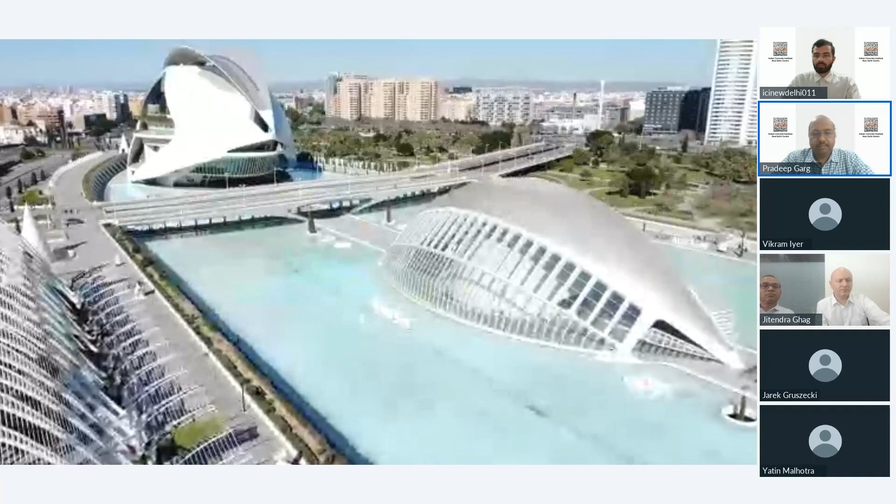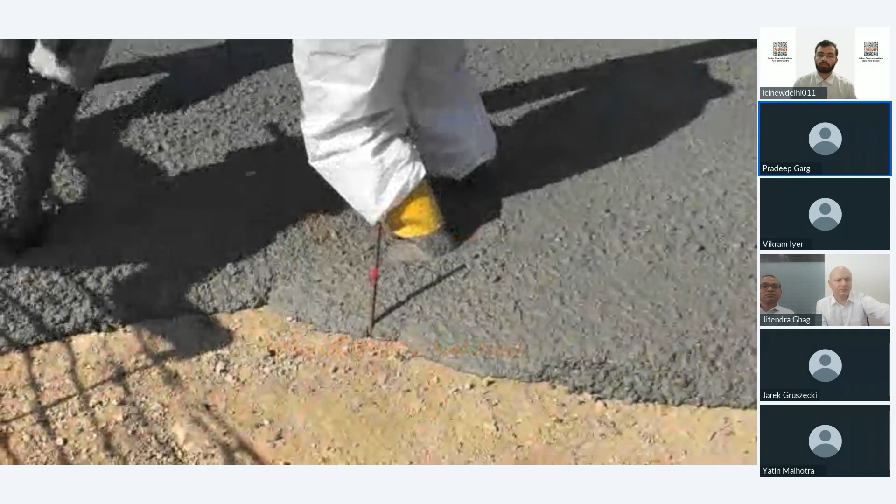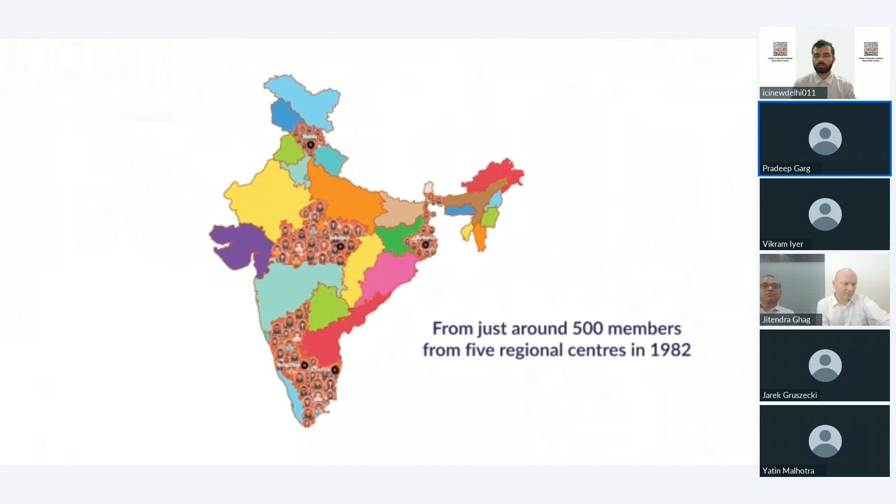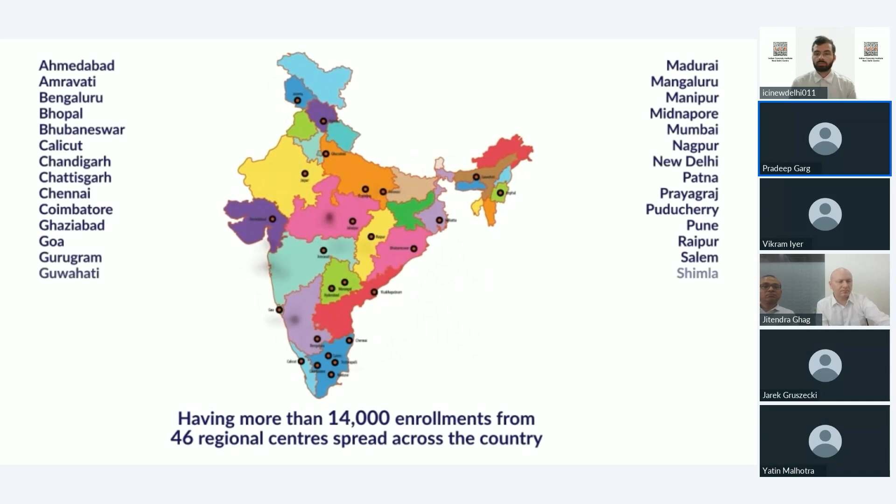Civilizations have prospered because mankind has taken gigantic leaps to harness technologies to create infrastructure, the backbone of all economies. The binder at the core of infrastructure development has been concrete. Spearheading advances in concrete and concrete construction in India is the Indian Concrete Institute, one of the leading professional bodies catering to the professional needs of individuals and organizations involved with concrete. As a non-profit organization, ICI is dedicated to the cause of disseminating knowledge and addressing constant research needs in the field of concrete, as well as to promote concrete technology and quality in construction. In 1982, SERC Chennai and Anna University jointly conducted an international seminar on modern concrete construction practices. The delegates of the seminar resolved to form an organization to spread knowledge so that developments in concrete could be shared with many Indian engineers. Thus, the Indian Concrete Institute was formed. From just around 500 members from 5 regional centers in 1982, ICI has grown today to be a strong professional body having more than 14,000 enrollments from 46 regional centers spread across the country. Of these, more than 400 are organizational members. Today, ICI is a binding force, creating synergy between all segments of people, namely practicing engineers, consultants, designers, manufacturers, research scholars, academicians, and students.

ICI, through its regional centers, conducts varieties of programs like seminars, workshops, conferences, exhibitions, training programs, webinars and more, each providing participants platforms for learning and sharing at national and international level. Each ICI event is a great opportunity to listen to and interact with all segments of people in the concrete industry and get updated on the latest materials, technologies, and practices.

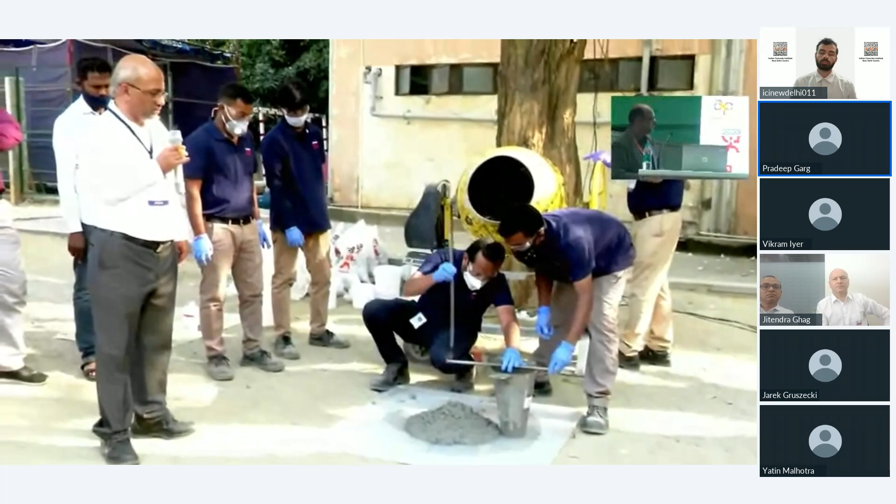ICI's program Deminar is a unique event combining demonstration and seminar. Here products are demonstrated outside and live streamed into the seminar hall, so participants can observe the demonstration while it is being explained by the speaker.

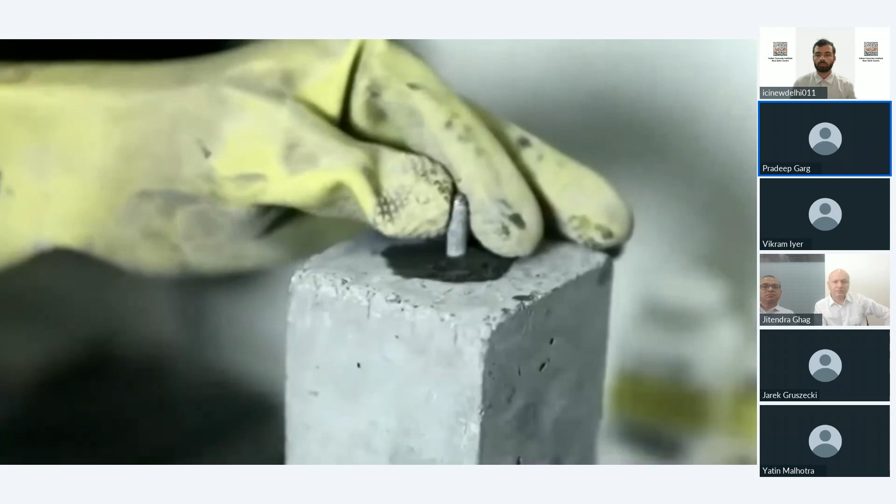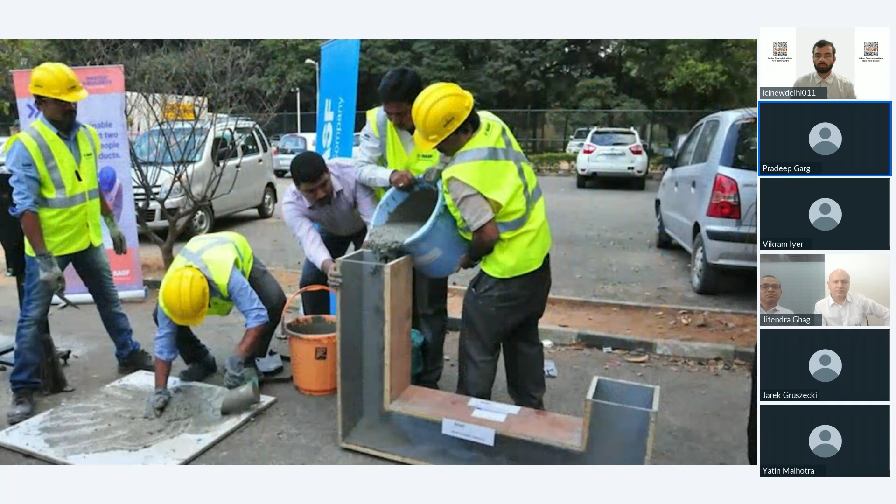ICI events, among other things, are focused on sustainability through the use of innovative materials and techniques. The response to such programs from government bodies is overwhelming. The objectives of ICI are clearly defined. Every action of ICI focuses on a tangible output for the benefit of practitioners, end users, and society at large.

On 7 September every year, Concrete Day is celebrated as an annual event at all centers in a big way, to commemorate the day of formation of ICI.

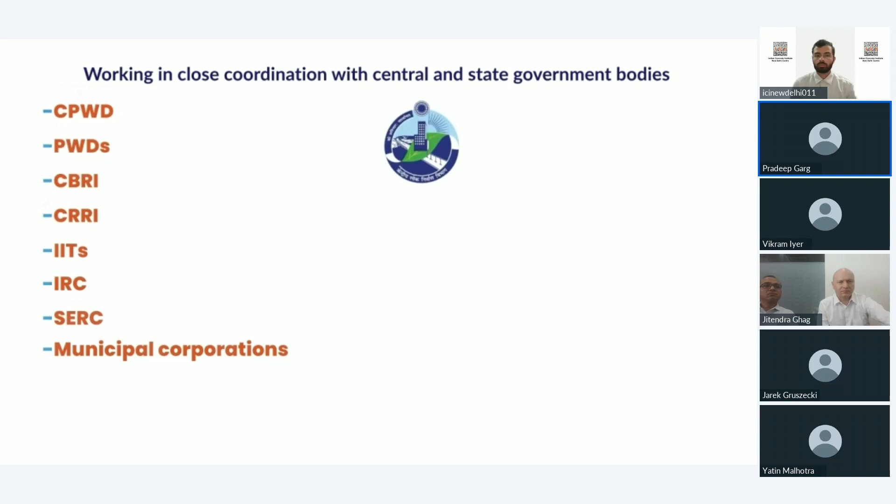Working in close coordination with central and state government bodies like CPWD, PWDs, CBRI, CRRI, SERC, IITs, municipal corporations and more, ICI helps these bodies adopt the latest technologies and practices in infrastructure building. ICI members also participate actively in several committees of BIS, focused towards advocating standardization in construction practices.

ICI is participating actively in the Asian Concrete Federation, a group of professional bodies of more than 10 Asian countries. ICI has signed MOUs with many other peer concrete institutes around the world for exchange of technological information, technical documents, and to organize programs jointly.

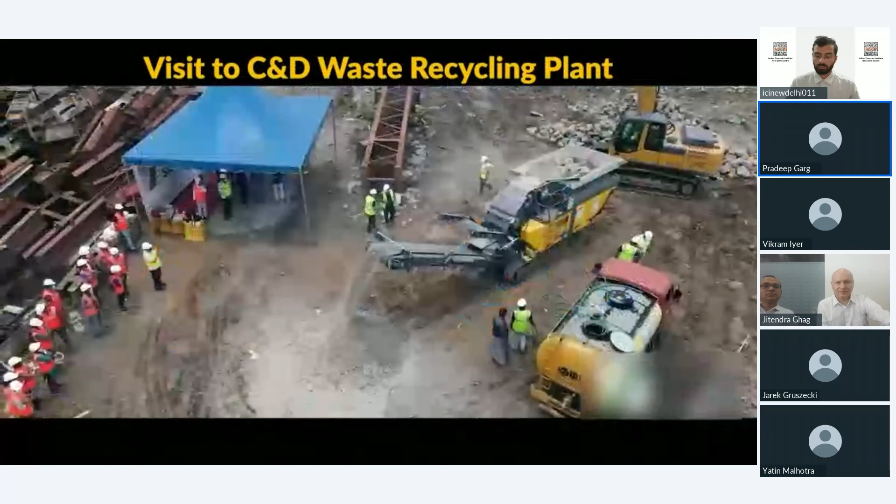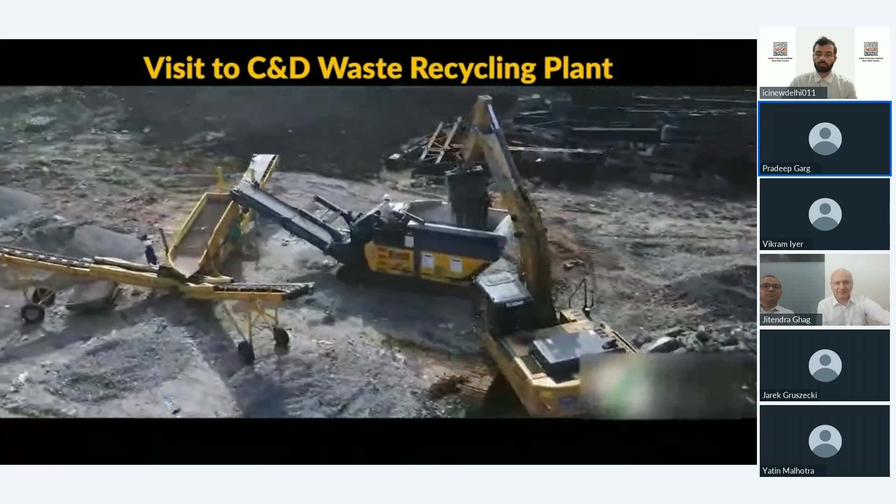Keeping the ever-changing future in perspective, ICI reaches budding civil engineers through its student chapters. There are more than 300 student chapters all over the country, and the numbers are constantly increasing. Each chapter is focused on enabling industry-academia interaction aimed at bridging the gap between basic theoretical knowledge and professional practice. This imparting of requisite knowledge to budding engineers enhances their outlook and employability.

ICI identifies, recognizes, and awards experts in the field of concrete for their contributions to the development of concrete technology and concrete construction. Every year, 16 such awards are presented at the time of the AGM.

To demystify concrete, the Technical Board of ICI brings out valuable technical documents on topics of importance for the benefit of practicing technocrats through its technical committees consisting of subject experts from different disciplines. ICI conducts need-based training programs at its technology centers as well as customer sites for the benefit of practicing engineers and students.

ICI Journal is of national repute today. Very soon, a journal of international standards will be brought out in collaboration with a world-renowned publisher.

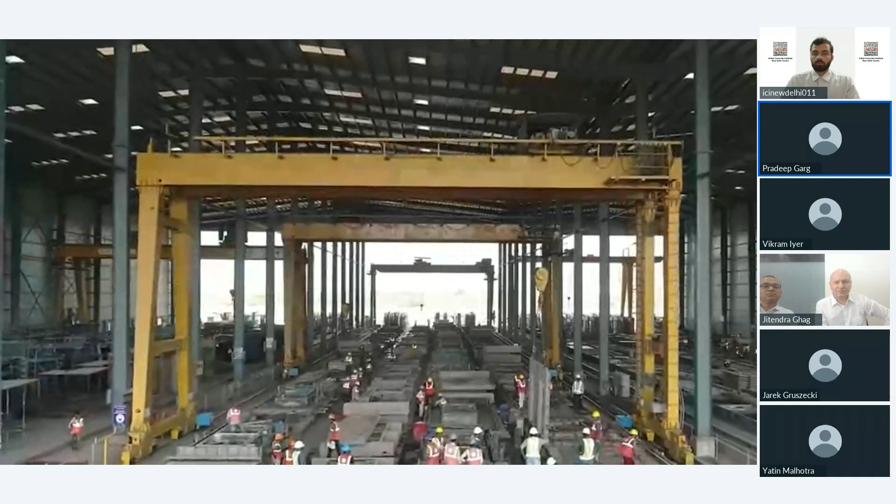Every dawn at ICI summons a new approach and new initiatives to create milestones in the journey of concrete construction in India. ICI has enabled the multifaceted and rapid development of concrete construction in a well-planned manner. It stands proud today with a distinguished reputation as a forerunner and a binding force in the civil engineering industry in India. Come, join and strengthen ICI. Let us make our concrete structures sustainable and durable.

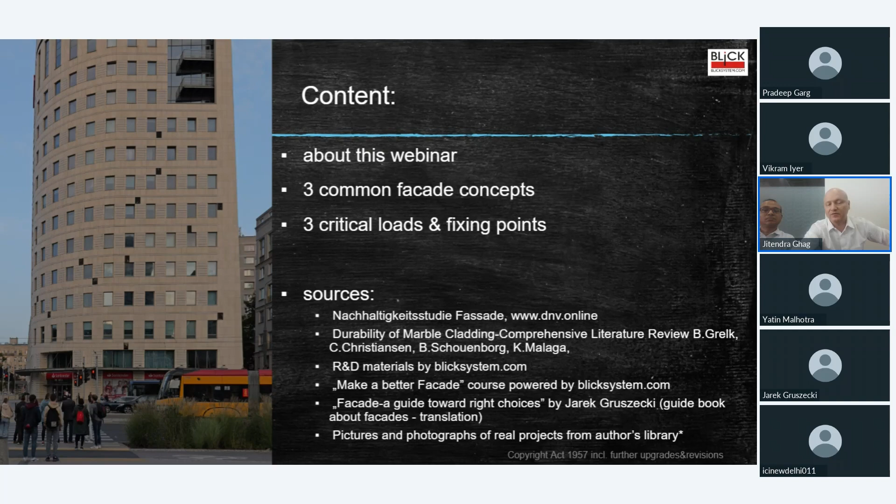In this presentation I also used a lot of data related to concrete, because design of the facade covers not only natural stone, but natural stone is in my heart from childhood. My father opened a company a few decades ago, and we ran a few quarries, majority soft stone. This is a good point, because sometimes we mix stone like one family, and it is useful to split this into soft stone like sandstone, travertine, or limestone, and hard stones like granite, basalt, quartzite. This will help us later in this presentation.

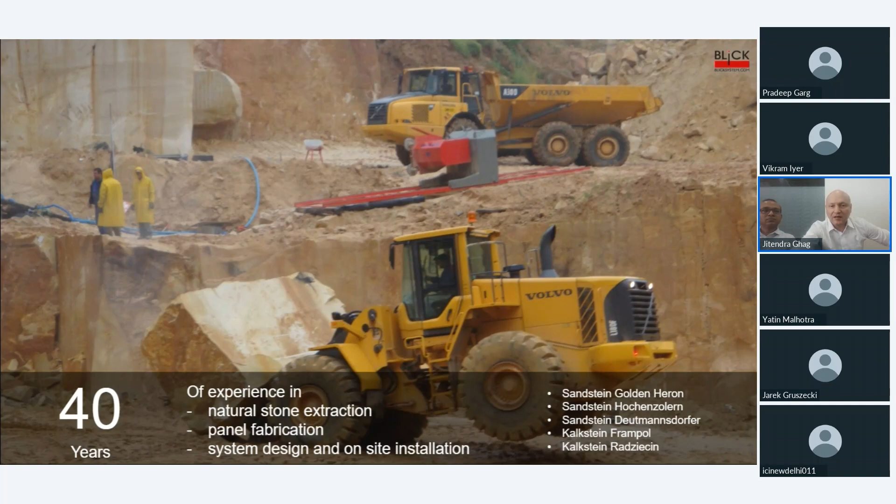So we also ran limestone, and I was working from the beginning of my career a little bit in the quarry, only watching and taking part, and then I was working physically also in the factory. So I have a lot of knowledge regarding the processing of the stone and how to deal with it, about detail production. And then my interest was to develop some solutions useful for fixing on the facade.

Because I noticed a lot of malfunctions or damages on the facade, and then certification, in these areas I could be helpful. But if I hear some interesting questions from you, I'm ready to also learn a little from you, and I welcome students too. I got a question before the webinar from one of the technical consultants related to this topic, and I will use some of that in my answer. It will go through my presentation.

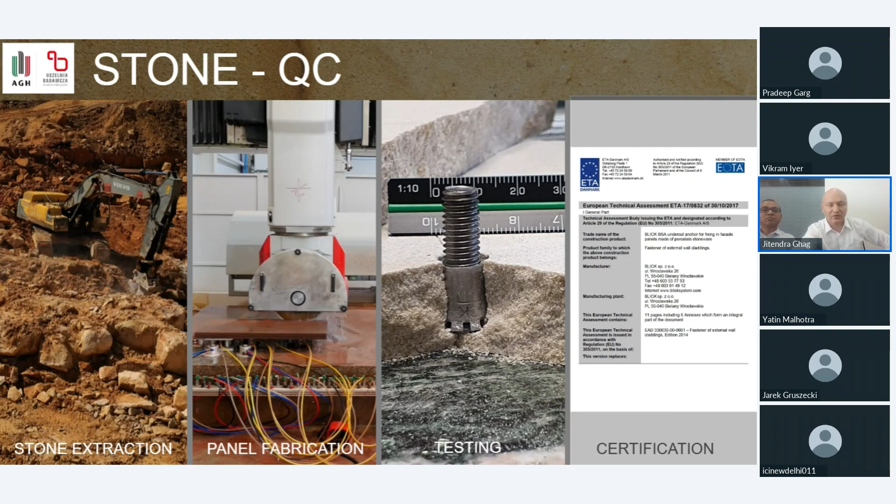I would like to start from the first typical concept of facade, which is wet cladding, I hope known to a lot of you. This is just using cement adhesive and fixing the tile to the wall. In Europe there was a time when 2 or 3 companies certified this system, and the main ingredient, or the way it was built, was that stone tiles could be fixed to the insulation, not directly to the insulation because there were few layers, but it could be fixed to the insulation.

Maximum weight of the stone was 40 kilo per square meter, 5 to 8 kilo per tile. And this is very important, because I noticed that in some projects this limitation is crossed, and then results of this exercise are different. Sometimes the panel breaks, sometimes the panel falls off.

The next limitation of this system is that the panel which is fixed to the wall has to be permeable. This is very important, because in areas where temperatures drop below 0, the vapor changes into water, then it's frozen just in the layer of the cement glue, and in the final result, these panels fall off from the wall. It is a very common mistake.

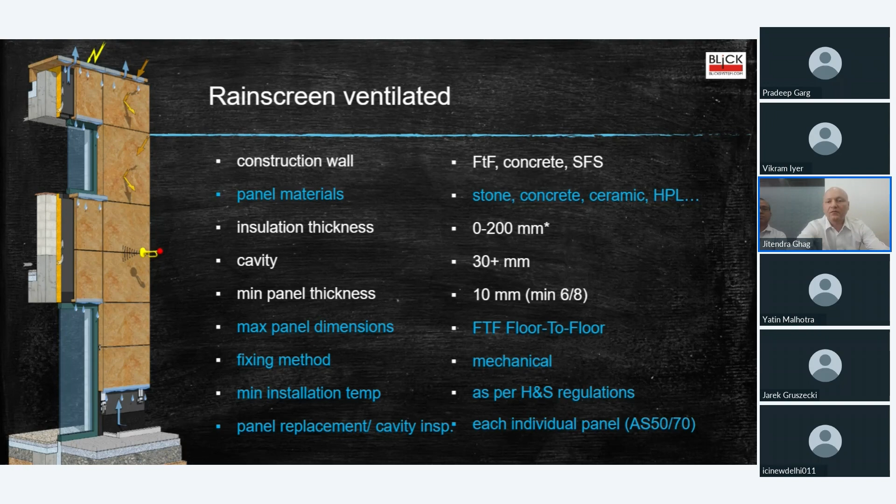Just to confirm that it is possible to install very big panels - this is an example from Africarium Zoo, where in 2014 the world's largest panels were installed. The size of the panel was 6.5 by 3.6 meters, with thickness of 12 millimeters. Total size of the facade was 6,500 square meters.

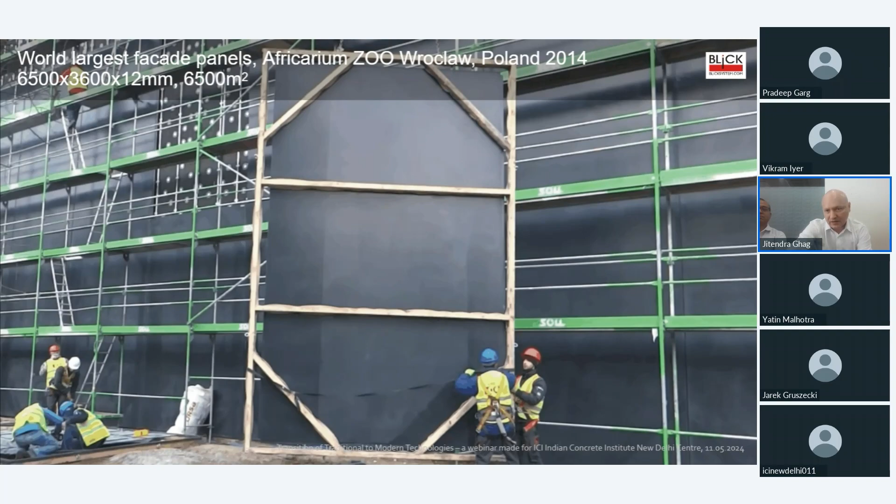And here you can see UHPC made in Pelhřimov in Czech Republic. This was about 16 millimeters, and the panels were also big, not as big as before, but floor-to-floor size.

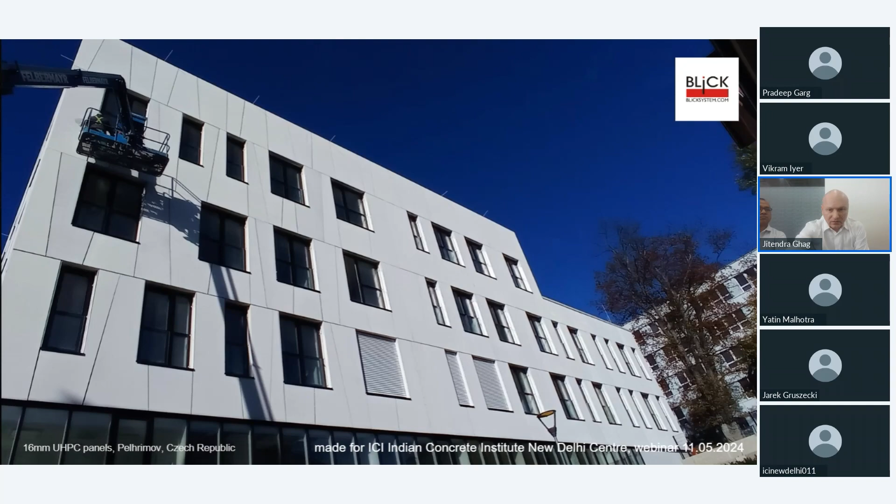Summarizing, we can definitely find successful references of all of these solutions: wet cladding, masonry vented, also rain screen. I think the majority of failures or damages which we find in every country is not only about these systems entering the strong Indian market - you can find malfunctions or damages in many countries. I will show you examples in a moment.

So as of now, I think we know about these three basic solutions. Right now I would like to go to the challenges which stay in front of these facades, because we should be aware of that. I have chosen three for this market, for this climate conditions, from many forces acting on the facade panel that want to destroy our facades. We need to protect it somehow.

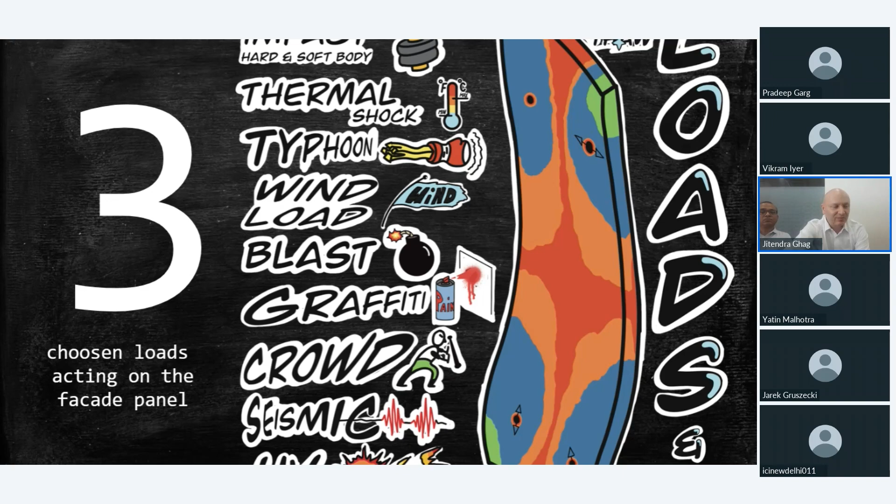The first one is thermal cycles. A very typical question I sometimes get is about zero joint gap, but we need to remember that the panel is exposed to thermal changes.

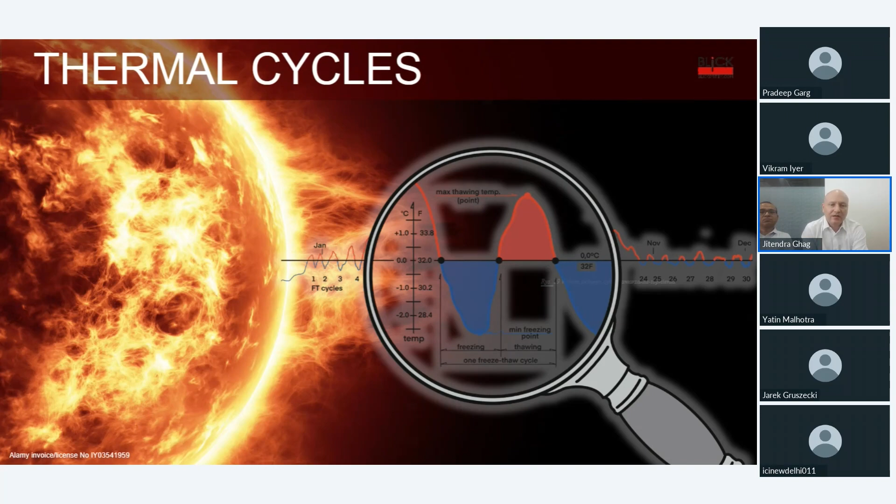This facade is, I think, already replaced, because I got this picture for consultation some while ago. This comes from UK. You see also limestone tiles, which are fixed on the kerf and also protected against falling down.

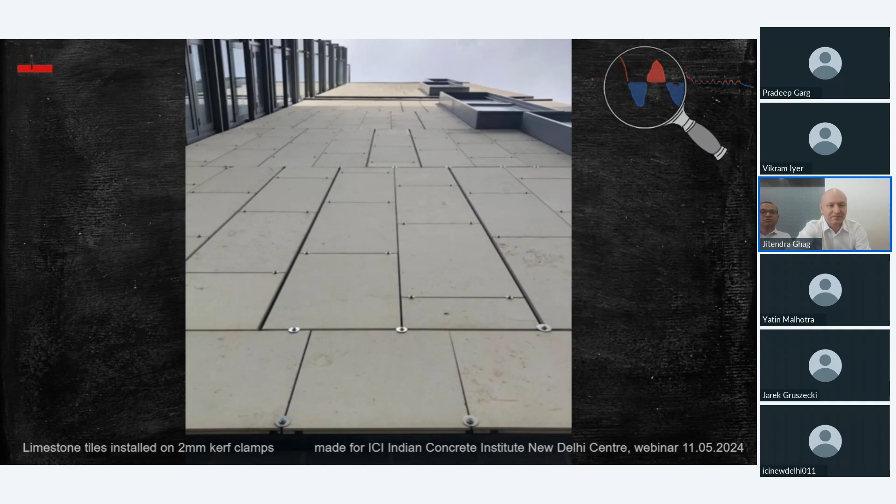Rain screen panels can be fixed in three ways. The typical is pin type, which many of you know because this is very common here. The next one is kerf, and the most advanced is undercut anchor.

The difference in pullout performance of this fixing is very big, because we made a comparison test in Heron sandstone, golden heron, for the German market, known as Hockenauer Sandstein. In 40 millimeter sandstone we reached 700 Newton pullout with pin type. Kerf presented about 1200, and undercut 5000. So this is a big difference.

If you see the space between undercut and pin type, there is a lot of comfort, so that's why we can install thinner panels and also bigger panels. The difference between pin type and kerf is that both these fixings can support the panel only on the edges - pin type in vertical and horizontal joints, and kerf only in horizontal joints.

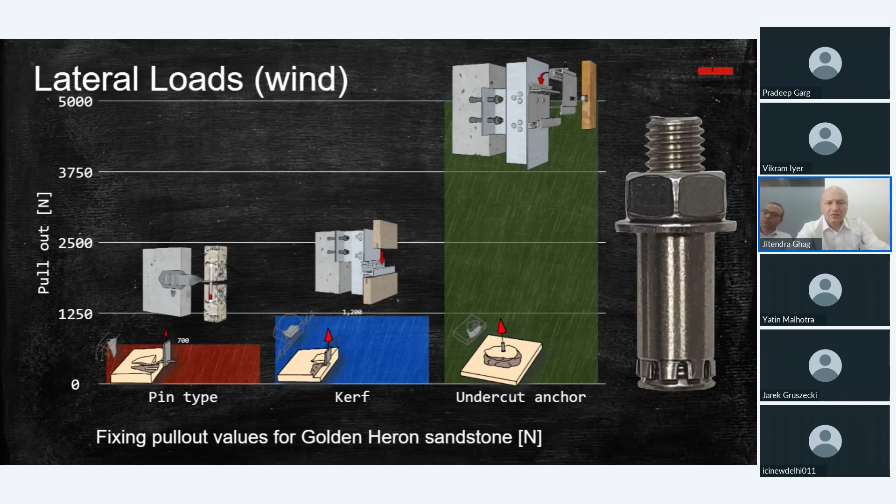The next load acting on the facade is wind-driven rain. Unfortunately, I was not facing the monsoon period in India, but I know, I've got the information, this is very heavy rain. If we combine together wind and rain, we get something like wind-driven rain, which acts on the facade.

How does it work? Normally the rain, driven by wind, blows onto the wall, and especially the top edge and corners of the building are exposed to rain, because in the central part of the wall, the wind doesn't go through the building - it has to pass by, going down or up depending on the central point. So the rain goes directly down.

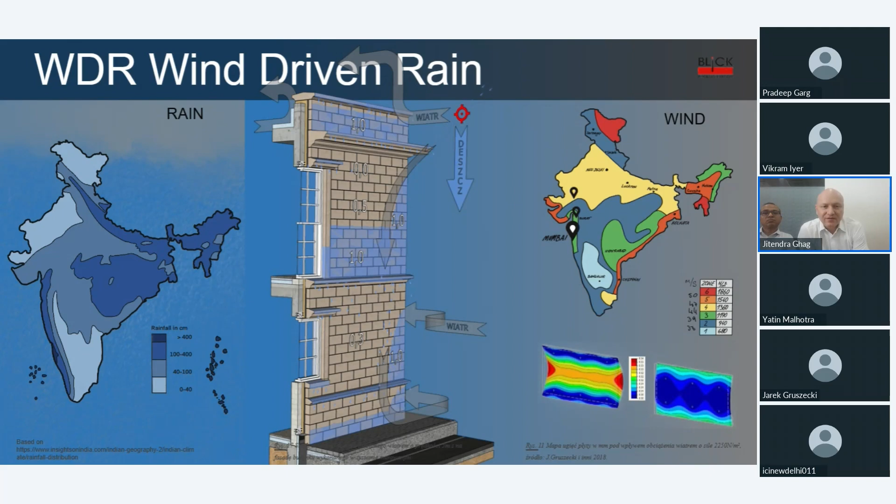So what happens if these assumptions we didn't apply to our design? In this situation, you see that there is no slope on this cornice. So these three points which I mentioned, you can use it and they are working. So there is no slope, the splash water is also affecting the panel above the cornice, and we see that the cornice is generally working well because panels below the cornice are clean.

I met last time Professor Marek Debisz from the Academy in Krakow, Mining Academy, Technical University of Mining in Krakow. He wrote a very interesting technical assessment related exactly to this topic. After reading this interesting literature, I found out that loss of flexural strength can cross 30% of the technical parameters of the stone, which is huge.

Lastly, I also took part in consultation of a project which, after 6 years from the installation, the whole facade has to be replaced. It was exposed to heavy rains, and the technical parameters of the stone dropped such a way that a facade of 6,000 square meters has to be replaced.

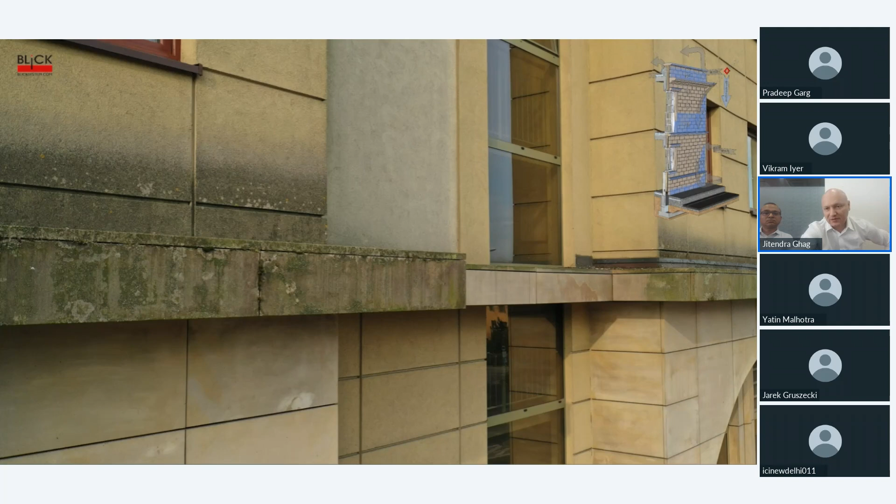But you can find much more examples of damages caused by wind-driven rain. One very common example is this Finlandia Hall. Here we see Carrara marbles which were affected by rain, humidity, and thermal cycles, and these panels are bent and have to be replaced.

So if we consider how important or how critical is the change of temperature in combination with humidity, you can see that this is really critical.

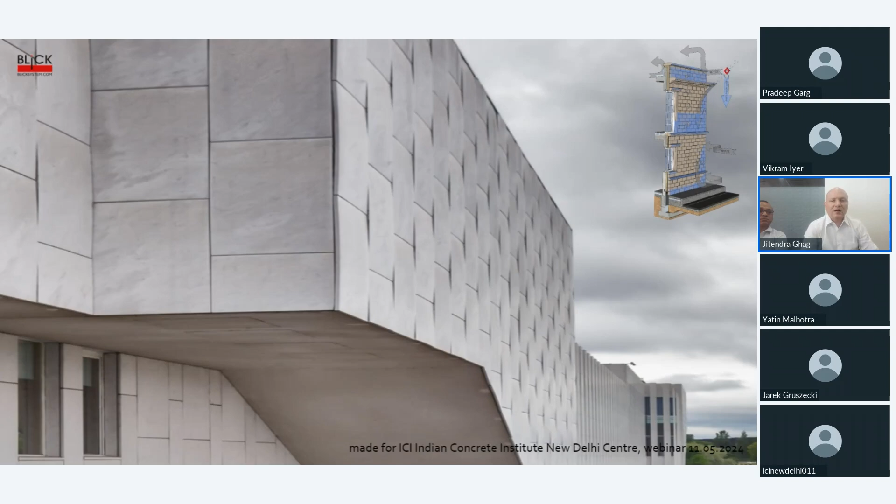So summarizing this webinar, my part, we know... Oh, I lost one. Sorry, I just lost some. Find out that I lost somewhere the slide.

Comparing these three systems, wet cladding, masonry, and rain screen, we see that the rain screen can deliver much more protection against wind-driven rain. It can give you much more freedom in the design of panel size. You can use really big panel sizes, and the range of materials used for the rain screen is much larger.

Facade height for wet cladding is limited to 20 meters of application because of this bonding. In some countries, you can find projects higher than 20 meters still using wet cladding, but this is rather, I would say, an exception from the rule.

By this limitation of 20 meters for wet cladding installation, I understand certified systems. So I'm not including in my webinar exceptions where some projects used bigger panels and are still there. This is definitely happening, but in this case I consider only certified systems from well-known companies.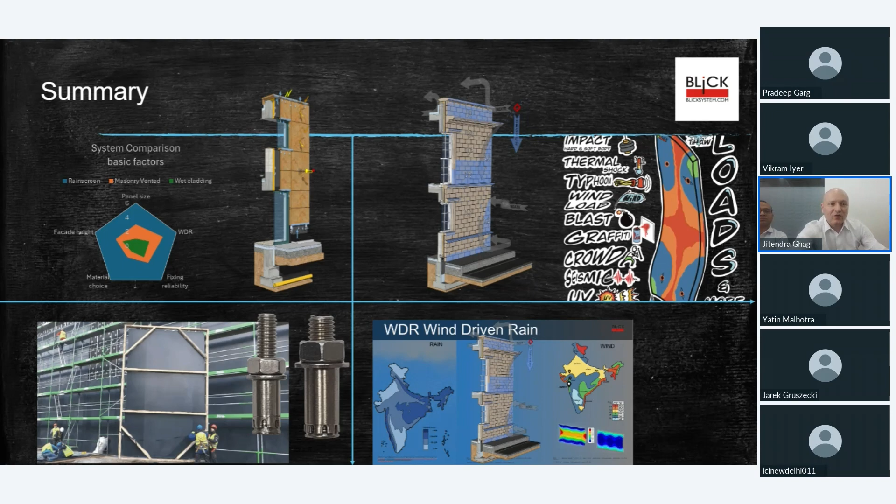So I hope that translation from traditional or common systems to modern ones will not look like this one, which before was wet, and probably right now we can consider this as dry cladding. And from my side, that's all. Thank you very much. If there are any questions, I'm ready to answer.

Let me go to the question from someone technical. I don't know the name of this person, but he's asking: in Jawahar Kalakendra, is 50 millimeter stone used today? Practice is 12 to 18. So yes, this is according to the rules that say 50 millimeter. I don't know what kind of stone or this building, but generally if this is 50 millimeter fixed on the pin type, this is as per rule.

Today we are able to install 12 or 18 millimeter panels because of undercut. We cannot mix it. Sometimes people use, let's say, 20 or 30 millimeter bigger panels but still use the undercut pin type or kerf, which is not okay. So definitely each fixing for each material has to be tested. This is nothing which we can calculate. There are some mathematical models, but by default, each fixing we have to test by each material.

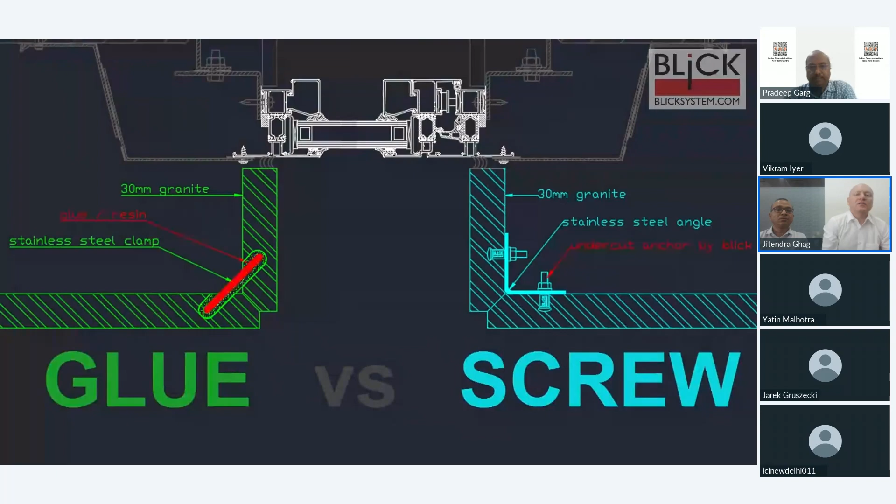Then he talked about, when designing, what issues are related to thermal impact, and he gave lovely slides and examples where the tiles have in fact bent because of thermal effects. Then he talked about the impact of cladding related to rains and wind-driven rains, giving excellent photographs and live examples of how, if the cornice are not properly sloped, there is an impact on the tiles and on the cladding.

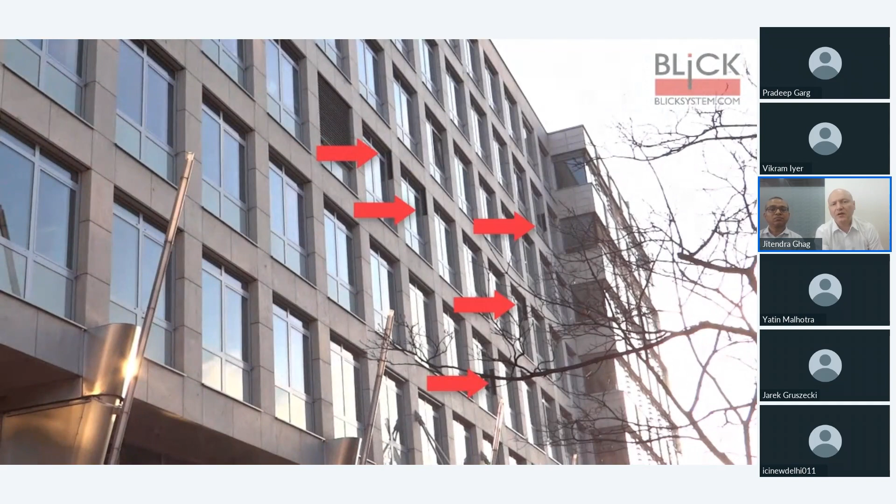And now Mr. Jitendra is going to talk about how the undercut system itself, how the dry stone cladding system or the ventilated facade system is to be installed. He is going to talk about that. Welcome, Mr. Jitendra.

Hello everyone. I will show you today the undercut fixing, how it is done, how the undercut system works in the building. First I will start with the project, which is Surat Diamond Bourse, one of the world's largest office spaces, with an area of approximately 200,000 square meters, that is 2 lakh square meters.

In this project, there are actually three types of stones used. One is this red Khada, which you can see in the fins in the buildings in the front. Around the towers there are glasses, and white ceramic stones are used, and at the soffit also there are stones. In the tower you see lighting and jali type perforation stones, called stone jalis. These come at every tower, and there are 9 towers in the building, plus 9 gates, where the stone is fixed under the soffit as well.

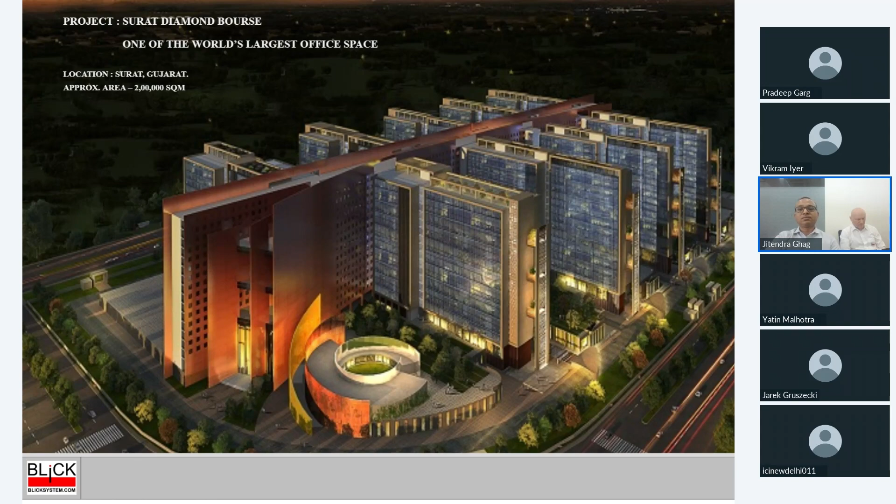So I will show you now how the system is fixed, or the design, around the stone cladding area. As Mr. Jarek showed in the last video, the critical part around the window is the jambs and the soffit stone. This undercut fixing gives us good flexibility that we can attach reveal panels, which are smaller in size, because the window is often fixed at the edge of the concrete. So the stone size of this reveal comes around 100 or sometimes 60, because the jamb stone is always stopped behind the main panel in the front.

This is why these jamb panels are always smaller in size. Putting any kind of framing at the jamb is not possible due to the fastener's edge distance, that is the critical part here. So these reveals, with help of undercuts and slots provided in the reveal, the tolerance of the stone can be accommodated, as well as the later expansion of the stone.

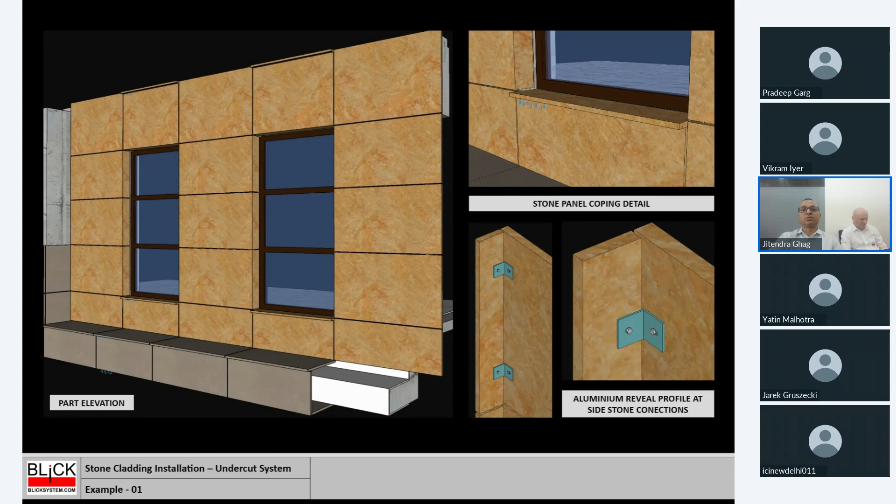I would like to show you the fixing of these verticals, how the structure is fixed on this stone cladding. First the brackets are fixed on the wall, and you have to see the left side of the sketch, where the bracket is fixed first and then the vertical frame is fixed.

The dead load is on only one bracket. The rest of the brackets act as wind load brackets. We need to give provision as the structure is not always in one line, so we have provision for plus minus in-and-out tolerances of the concrete, which can be accommodated in the bracket. This system can work such that the cavity can go from 60 to even up to 190 or 200 mm, plus minus tolerance also can be accommodated.

We always prefer to give the aluminum structure, as it is a ventilated facade where moisture or some amount of water can enter inside. Hence we never give any framing other than aluminum. Definitely SS316 can be provided, but it will be very costly, so aluminum structure is used to avoid those problems.

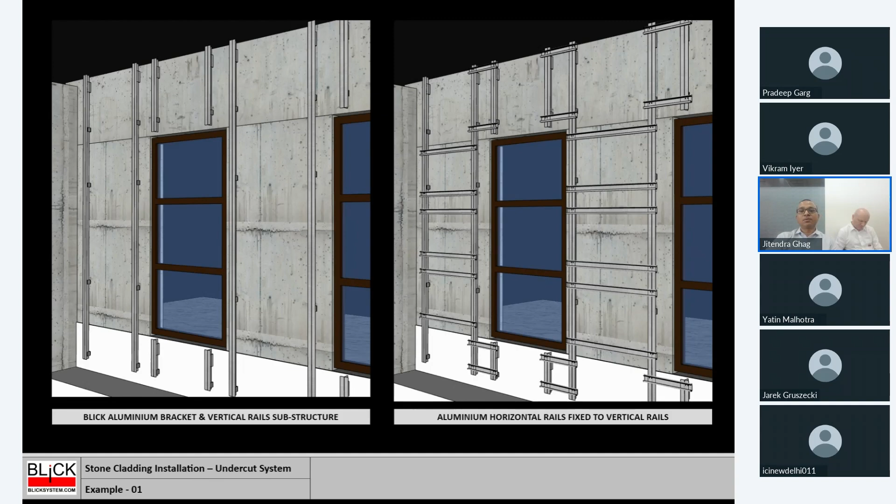This is how the framing is done, floor to floor. The dead load is transferred to the concrete, and only the wind load is transferred to the block work. These fixings are totally dependent on the wind load, so structural calculation needs to be done, and we do the structure calculation as per project specific requirements.

This is how we see the shifted panels. The framing has a different vertical rail on one floor, and in the middle additional rails are fixed to receive this pattern of stones.

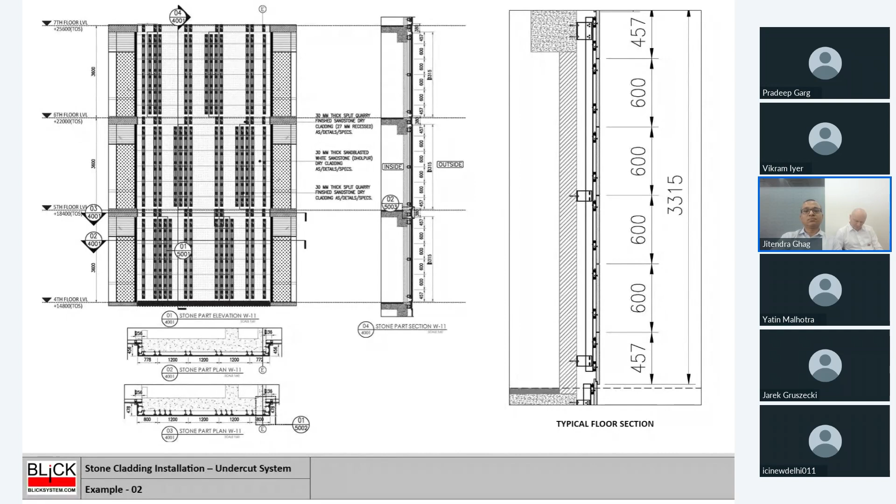These stone panels, if regular standard panels, generally have 4 fixings. The upper 2 fixings transfer the dead load of the panel, and the bottom 2 are used for transferring wind load only, plus it is allowed for thermal movements. As Mr. Jarek showed, thermal movement and thermal expansion is a big challenge in the rain screen system, which can break the panel or cause it to come out from the facade.

This load bearing fixing system is good enough for seismic conditions, as we are putting one locking screw in the clamp so that it will stop the crawling as well. So for this stone panel, one clamp is actually fixed, while the remaining 3 clamps can move sideways, and the bottom can move vertically.

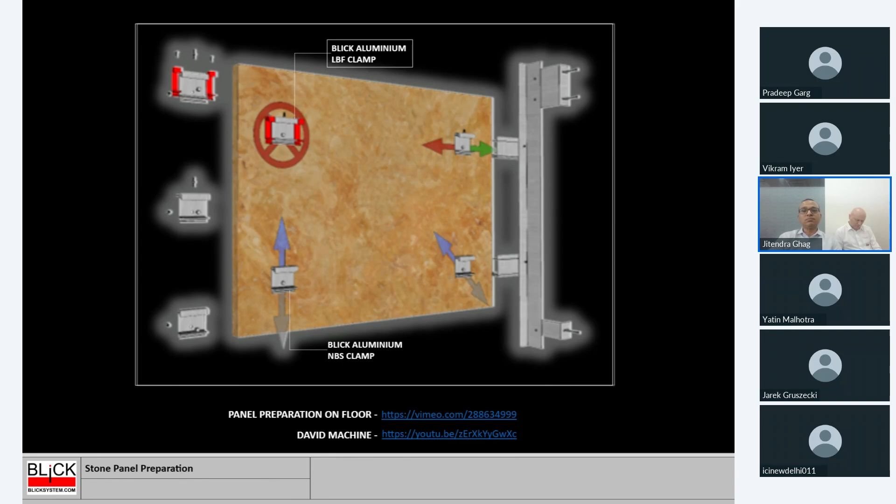To fix that, there is a methodology and a system that I will show you later, at the end of this presentation.

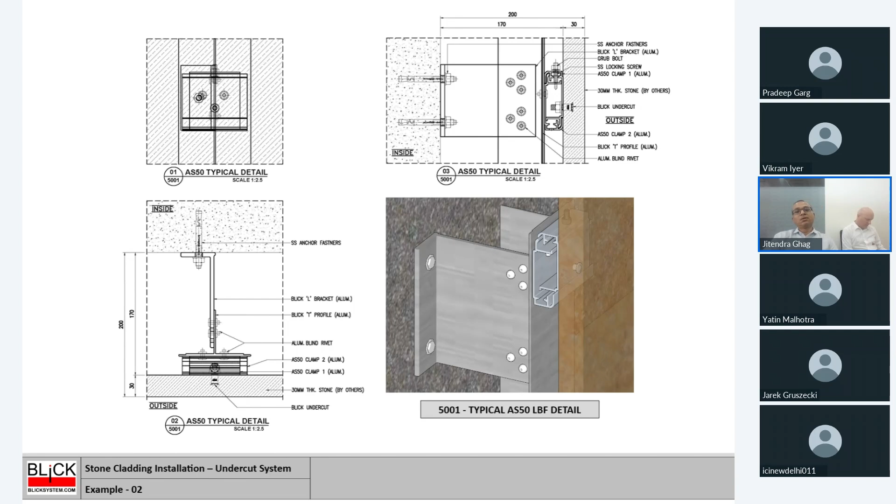As I told you, the locking screw will be only on one of the clamps at the panel above. In one panel at the top there are 2 clamps - only one clamp will have the locking screw. The other clamp does not have any locking screw, but both clamps will have the grub bolt, which transfers the load to the rails, and from the rails it is transferred to the verticals, and from there to the bracket and then to the structure of the building.

This is the detail showing the expansion of the clamps. Here we can provide the gap to allow the stone panel to expand due to thermal or building movement. The verticals also need to provide for thermal movement because of temperature difference, plus building movement as well. Here you see the cavity, which we achieve at 170 mm, and this cavity can be adjusted plus or minus 25 mm as site tolerance or concrete tolerance.

This is the 3D view of that structure, which I have shown as horizontally shifted panels.

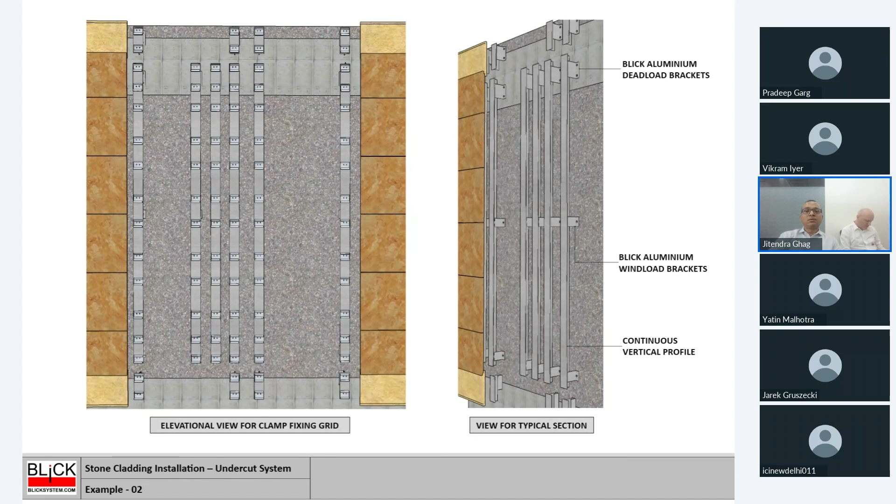Now I will go to the videos which show how the undercuts are being done in the panels.

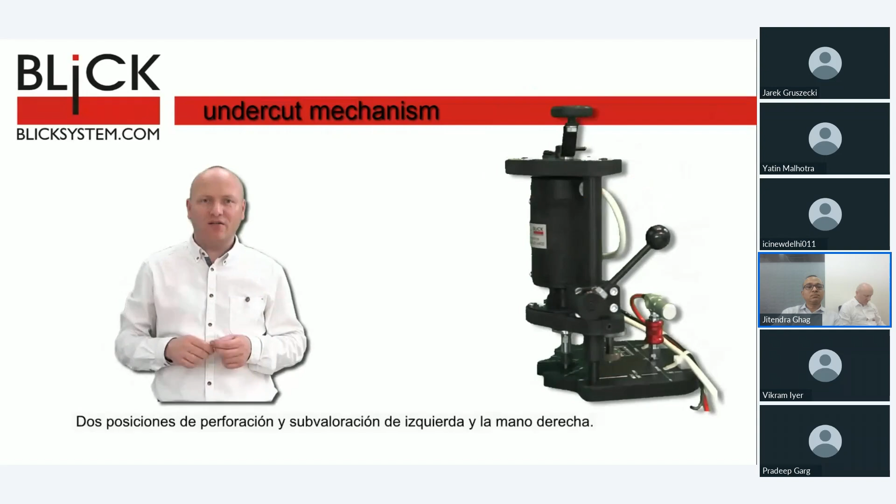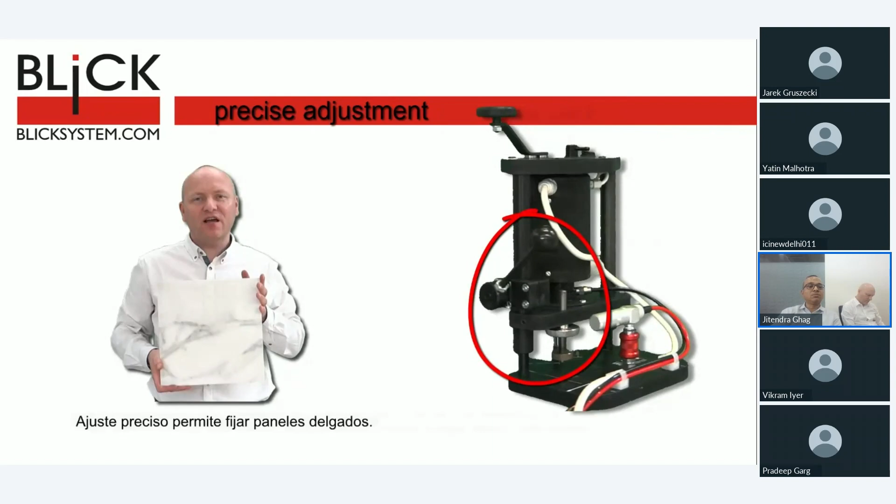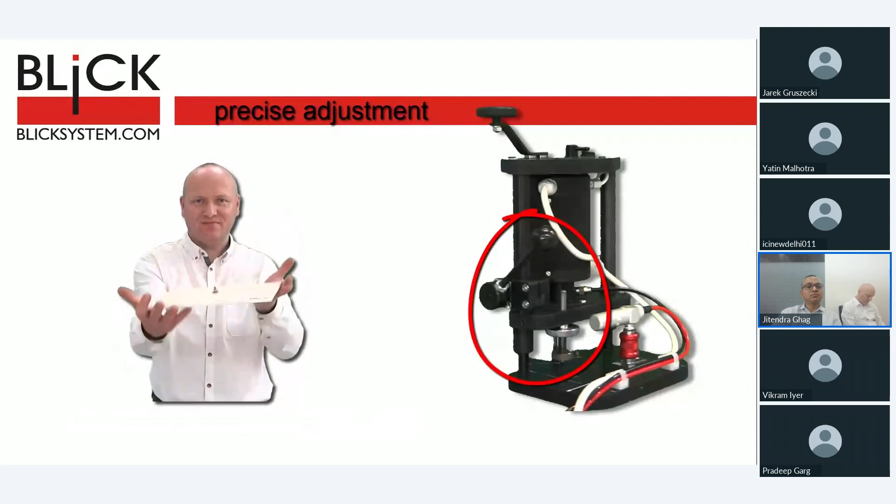This is actually the thinnest panel. You will see the undercut being fixed to it. It's only a 12 mm thin stone.

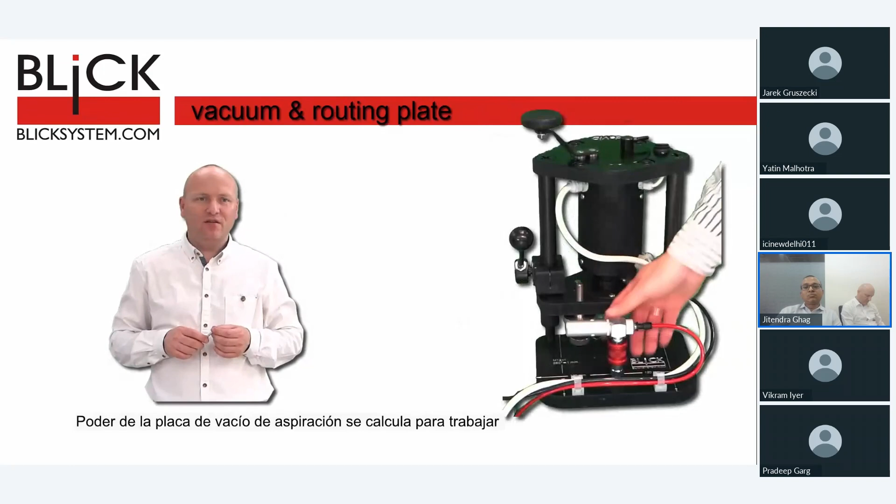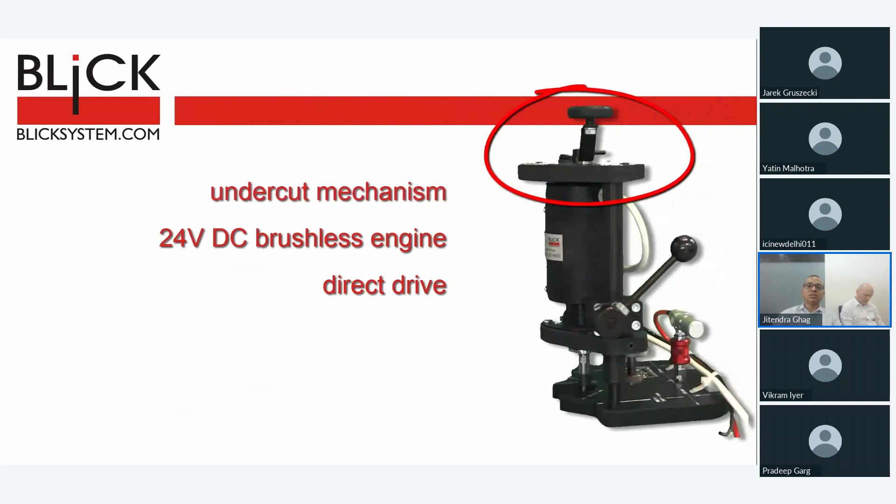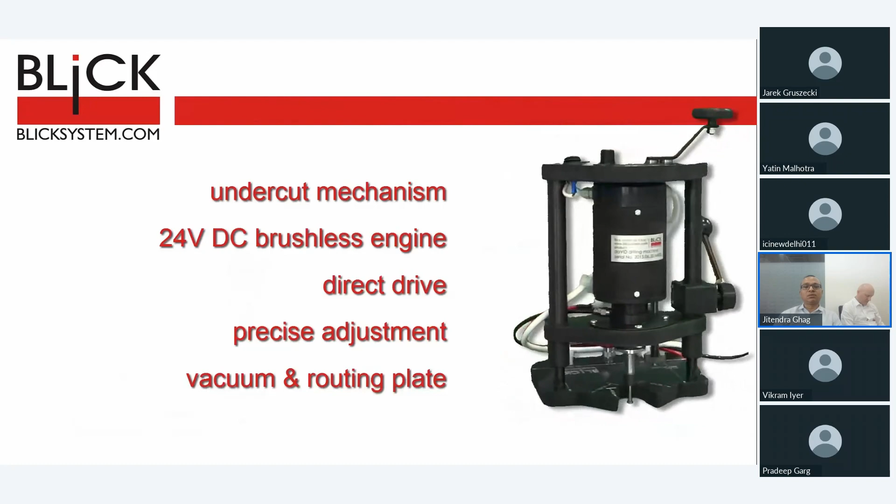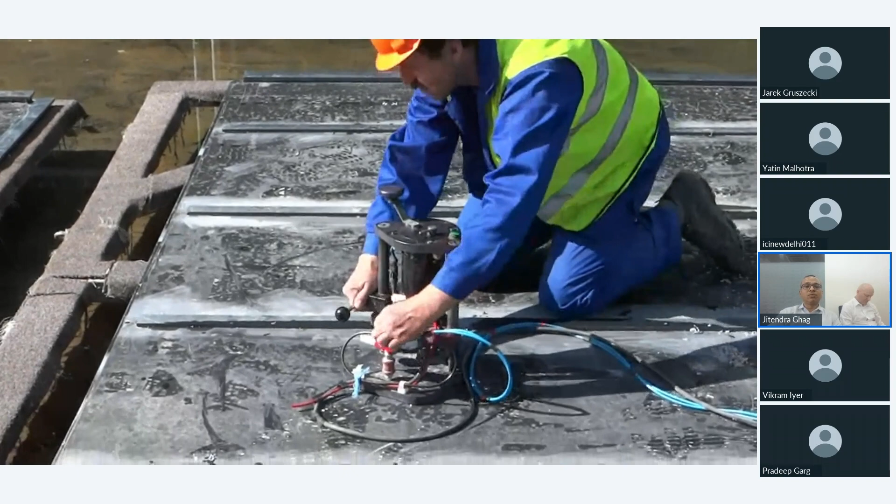Undercut drilling machines have various technologies - each company has a different one. This is our company's model, and it is very light in weight. It can be very easily operated because the weight is very low, and this will be used on the site, as well as there is a provision we have.

There is another video I will show you now. This video shows how the undercut is being done in the stone panel.

Then the next step is how to fix the undercut in the stone. We have our own method, whereas there is a traditional method. Some companies put the undercut and hammer from the top or bottom of the stone. What are the issues with that? I will show you through the videos.

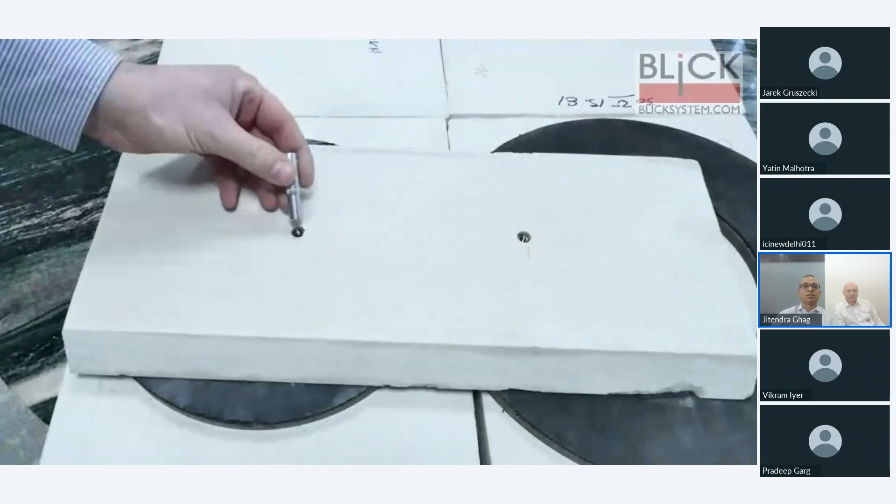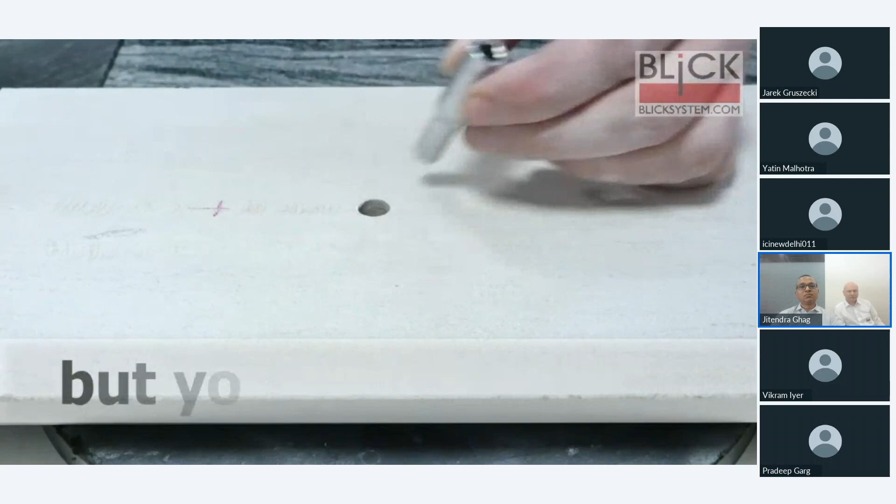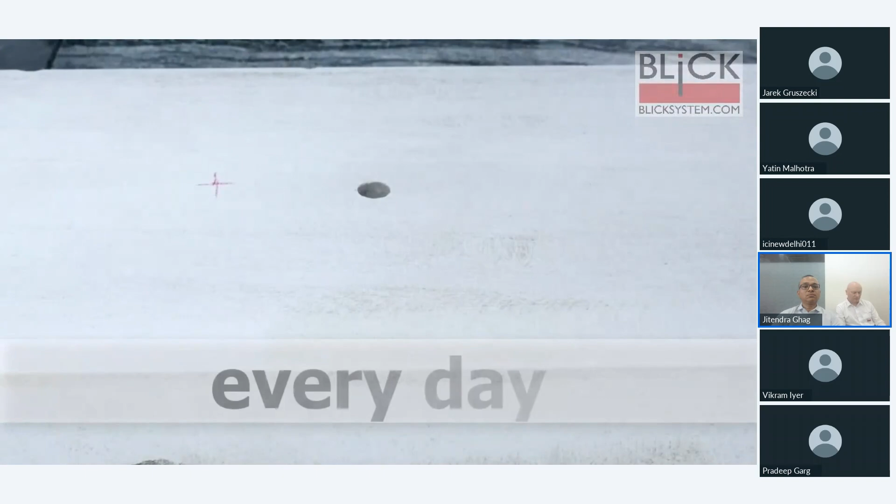This first part of the video will show how the stone's undercut was traditionally fit by hammering the undercuts to expand inside. The disadvantage of that is breakage in the stone. Even using lesser force, there is still a possibility of chip-off happening at the back of the stone.

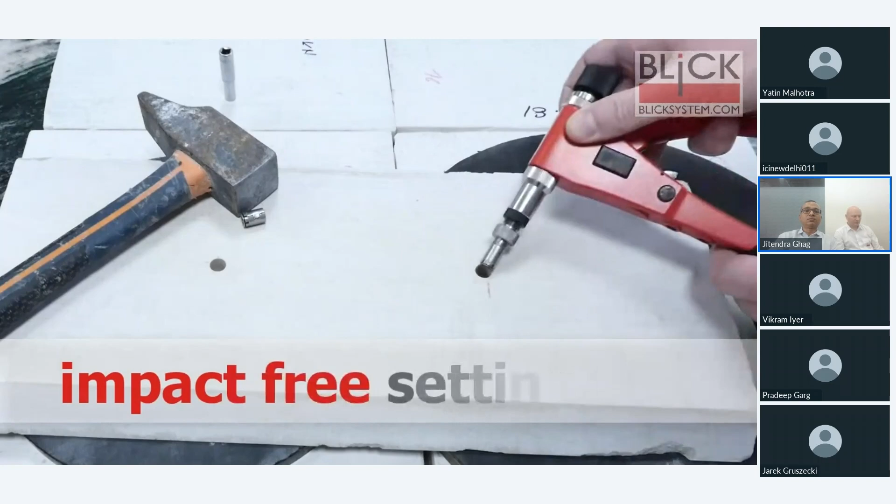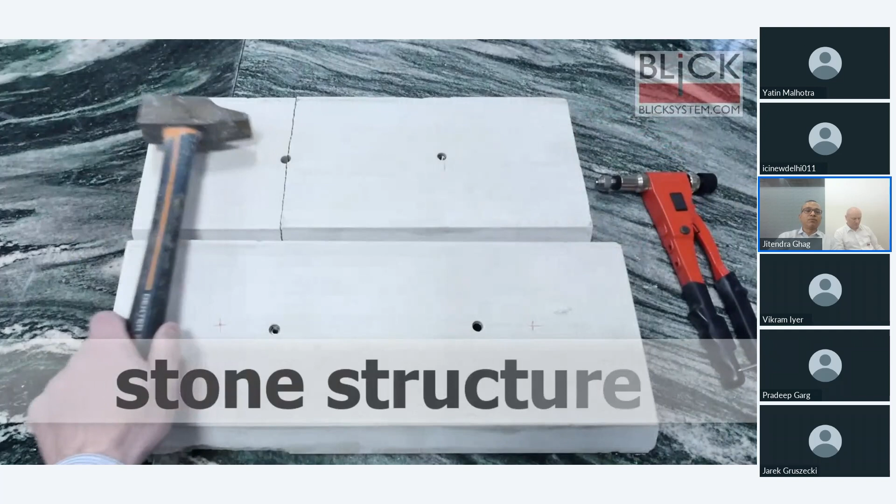There is a possibility that if someone applies less force, the anchors may not expand correctly inside the stone. That will give the problem that the anchor's resistance force in the stone will be reduced, and it can risk failure of the stone after installation.

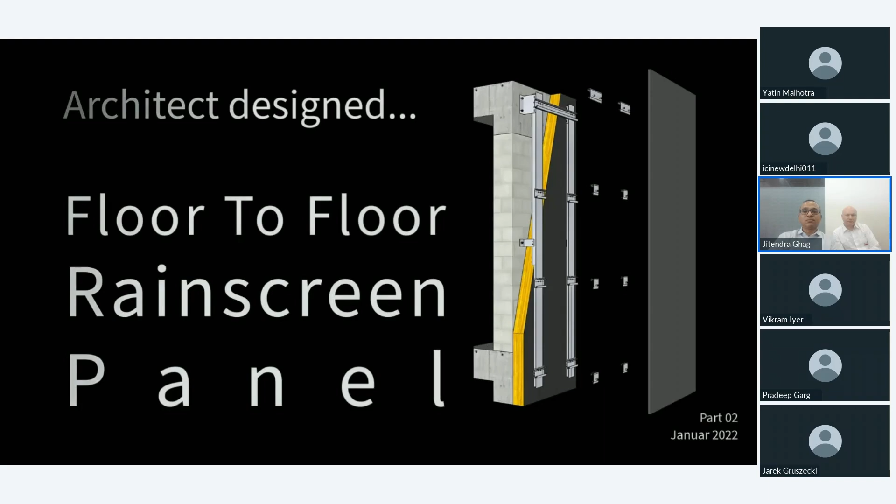Another thing I'd like to share is how big the facade stone can be. The architect can choose a bigger facade stone, like a floor-to-floor height stone, because there is a possibility that the undercut can be fixed in the middle of the stone. Everyone is aware that the major wind load and major forces will be created in the middle of the panel, so the deflections are more, and that can cause breakage of the stone.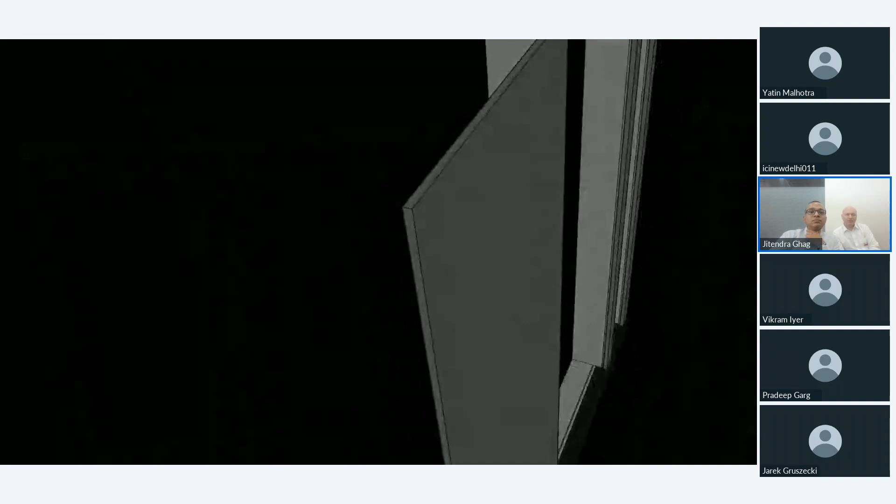Hence, this undercut system provides us the advantage of controlling that deflection and preventing breakage by fixing it in the middle of the panel.

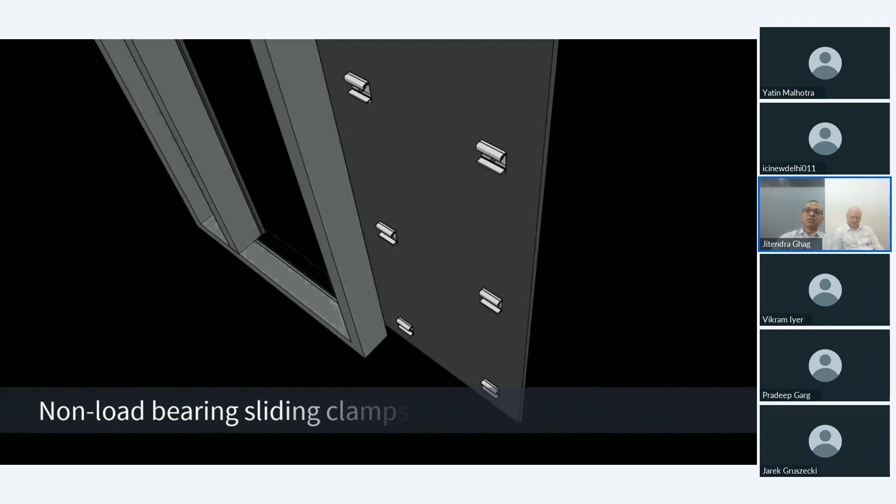This is actually the floor-to-floor panels. GRC. This is GRC panels.

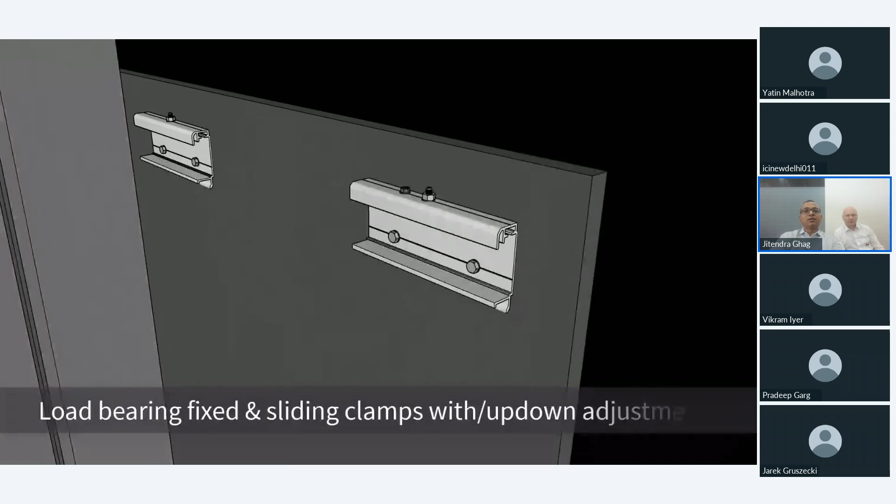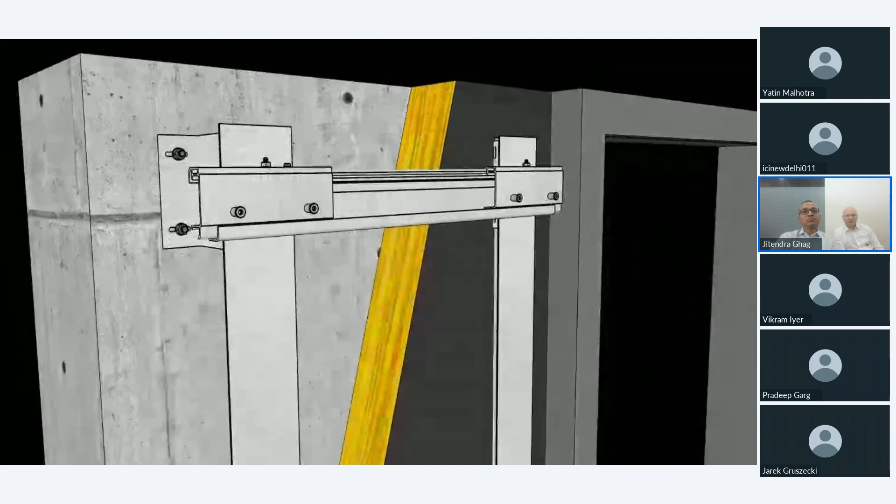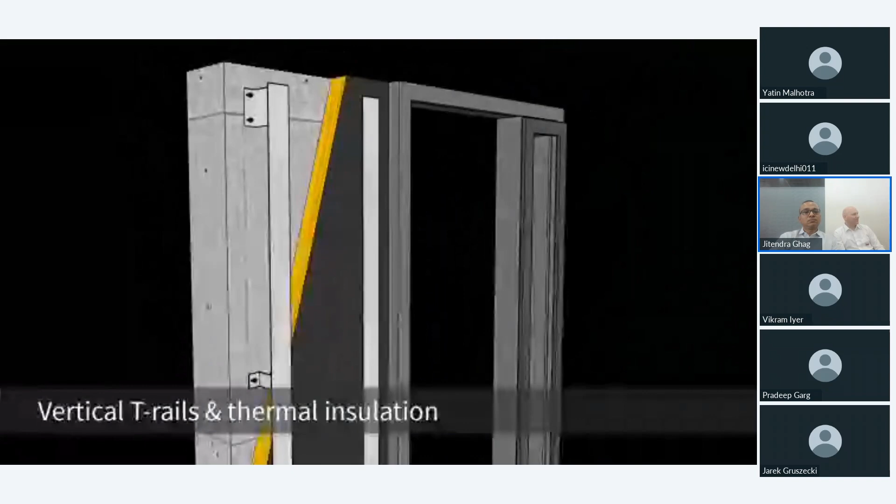You see these, all the clamps are fixed in the middle of the panel as well, which is actually a type of fixing that cannot be performed in the pin type or even in the kerf type. The pin and kerf type is only possible to fix on the edge of the panel.

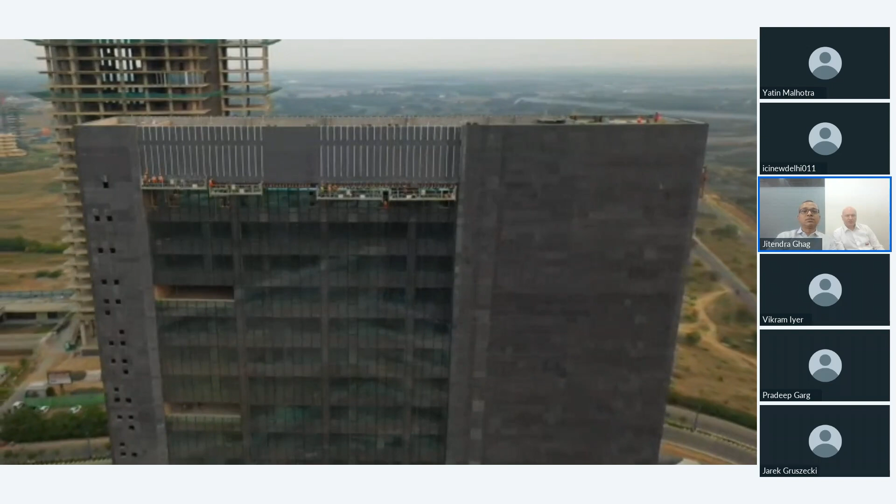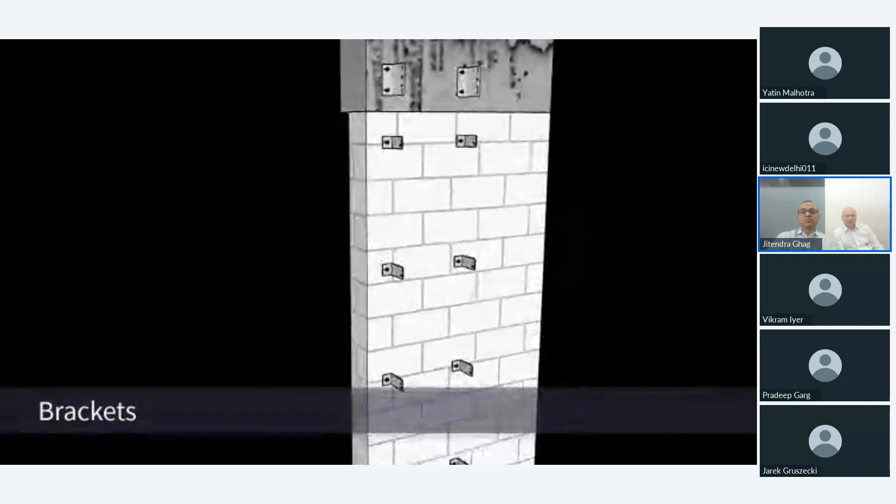Then I would like to actually show one of the buildings in Gift City, which we have done with this system. A gondola is being used to do the rail fixings, vertical fixings and the stone fixings. These are all black granite.